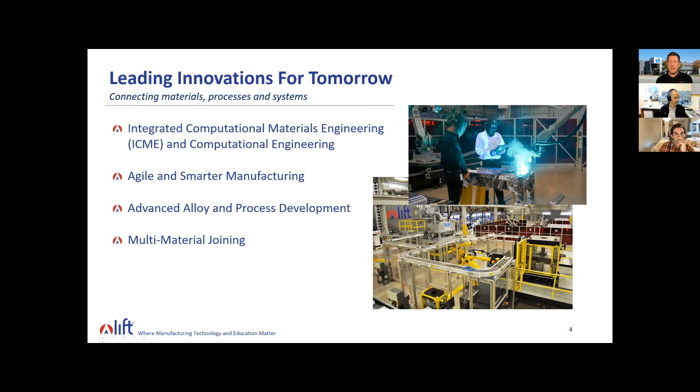We have four main pillars of technology, all the way from ICME, integrated computational materials engineering, to agile and smarter manufacturing, to alloy and process development, multi-material joining. All of these are areas of focus in which we work. A little bit deeper dive here on the screen. You can see all the different avenues and different project areas that we work on underneath those pillars. So you can imagine there's a lot of work going on in our ecosystem focused on these pillars.

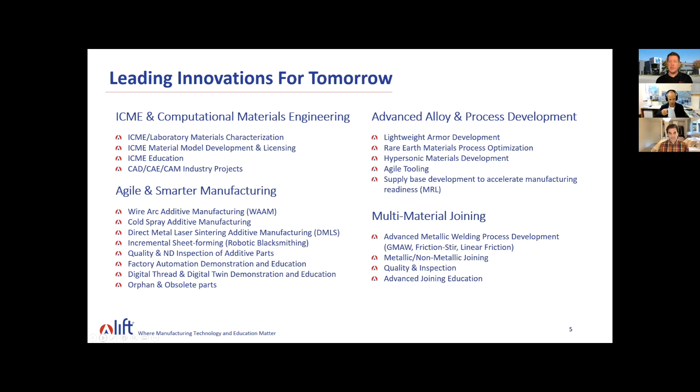On the talent side, again, it's all about innovation, new learning tools, pathways, and venues, kind of revolving around our Ignite Mastering Manufacturing curriculum, which is a high school curriculum, 3-year program that high school students participate in around the country, actually. But we do host it at our LIFT Learning Lab as well, which is in our Detroit facility, overlooking our high bay. So not only do students come in to participate in the Ignite curriculum and get some hands-on experience with material science and pneumatics, electronics, smart manufacturing, all of those things, just to see what manufacturing looks like in the year 2021, but they get to look out on our high bay floor and see our technicians hard at work with innovations that our members are currently working on.

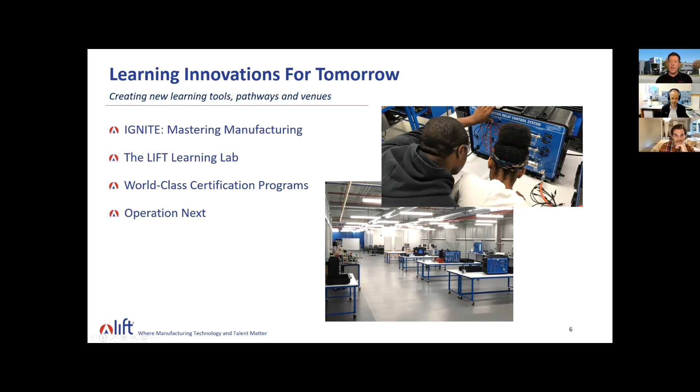We also offer world-class certification programs in jobs that are available today: CNC, welding, industrial technology maintenance, robotics. We offer that via our LIFT certified program, as well as a program called Operation Next, which is one we are most proud of, for active duty men and women in the military. Before they leave the service, we give them the opportunity to earn a credential in one of those in-demand jobs.

So not only do they leave the base and get on to their next operation, their civilian career, but they walk out of the gates with an in-demand, industry-recognized, nationally portable credential so they can go get a job immediately. And that program has been expanding across the country. It's available to the National Guard and Reserve in Michigan, Florida, Wisconsin, and also available at Fort Campbell, Kentucky. And stay tuned for a future announcement on another base later on this year. So we're excited about that program.

So I mentioned LIFT is a membership organization. So what do you get from being a LIFT member? Well, all the things you see on the screen, from being a trusted advisor, helping people turn the corner with smarter manufacturing, technology accelerator, taking technology innovations from concept to commercialization, technology showcase, invites you to visit our 100,000 square foot facility you see behind me in Detroit, showing you the art of the possible with smarter manufacturing. We're a connector and convener, which is why we're all here today. A talent developer, spoke with you about that already.

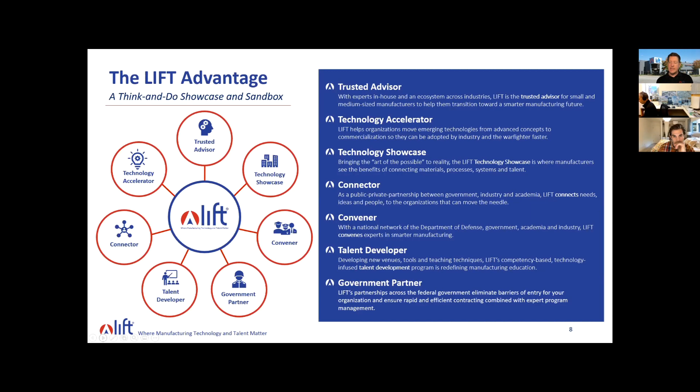So that is LIFT in a nutshell, but I'm going to stop sharing my screen and I'm going to turn it over to Ethan and Riley from ARRIS Composites to talk to us about what they're working on. So gentlemen, the show is yours.

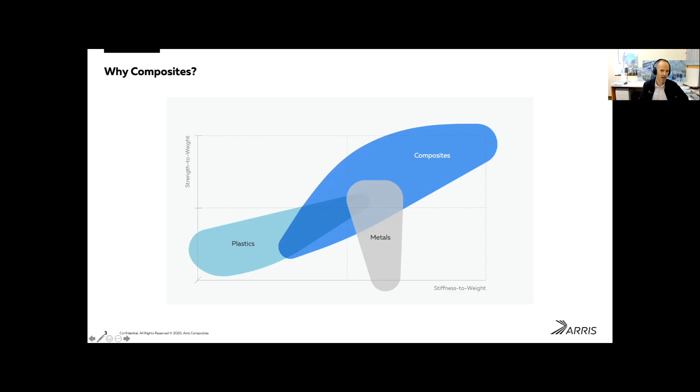But with that, those chopped fibers essentially pushed the plastic space a little bit up into the right of this stiffness to weight, strength to weight ratio chart, giving plastics the ability to move into some of the spaces where you'd have aluminum and some of the metals and the non-structural parts. However, with many of the advanced composites, whether it's sheet materials or aligned fiber materials, the cost of many of those manufacturing methods was out of reach for the larger mass market industries.

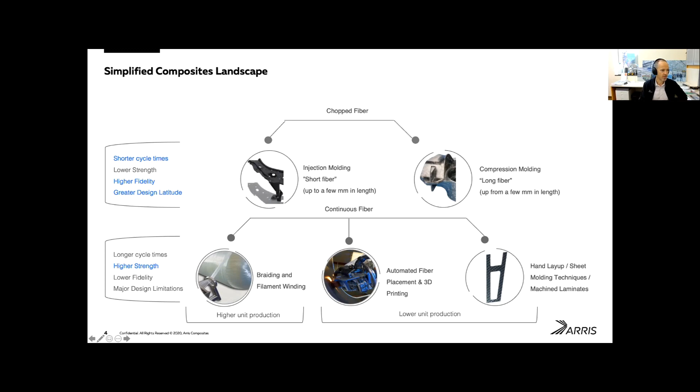And we won't go through this in a lot of detail, but the important point here with this overview of the composites landscape is that these technologies on the top row that had greater design latitude to make the valuable parts that carried load paths through all three dimensions really had lower strength, whereas many of the higher strength methods on the bottom row have significant design limitations associated with them. So this is really the space that we came into, where we're looking at these feedstocks that are typically used in the continuous fiber world.

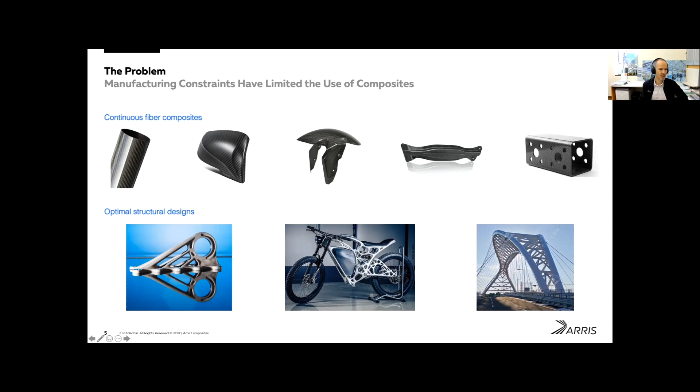And looking at these feedstocks, this was really in the backdrop of this renaissance of structural design, where topology optimization and these academically ideal designs were being really popularized by the 3D printing industry. However, the manufacturing methods, primarily working with pure resins or pure metals, were not really the best material for these lightweight structural designs. And the challenge revolves around, we use the grain of a tree to demonstrate anisotropic materials, these orthotropic composites, and how intuitively we all know how the grain of a tree follows the load paths that the branches and the boughs face.

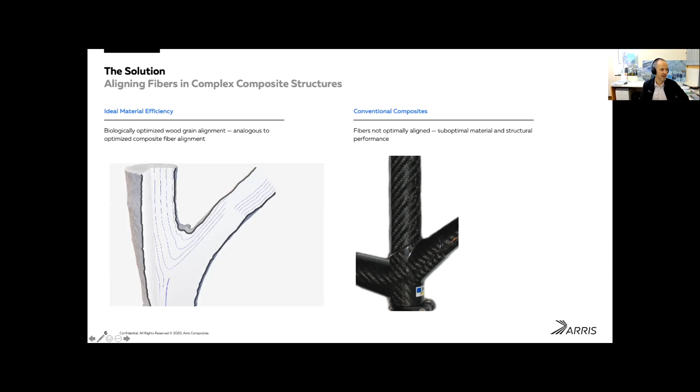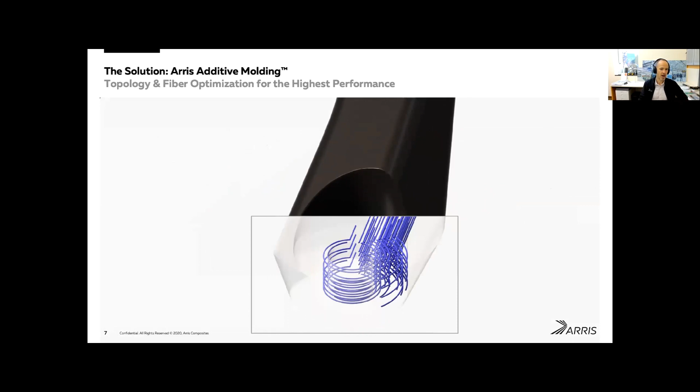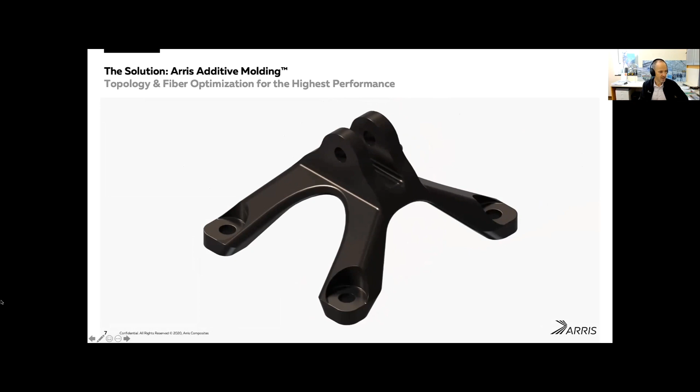And the challenge in complex composite structures is running the fibers through; that is not really practical today. And this is really where we developed our manufacturing method to enable the use of these continuous fiber materials, but aligning them along the stress loading paths within these complex parts, and in particular, these topology optimized parts, where you're getting the best out of both worlds, the best of the structural design world and the best out of the materials world. And this is an image of the actual part that was in that animation.

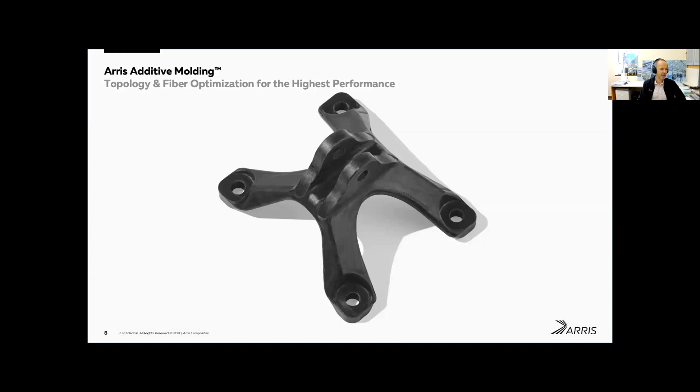And what I'm going to do is hand the presentation for a couple slides here to our CTO and material scientist by training, Riley Reese, to speak a little bit about the work that we've done with a few customers and how we do this. So Riley, are you? Yeah, sure. You have audio? Yep, I'd like to start with this Northrop Grumman study.

So we had a detailed paper that we published in collaboration with Northrop Grumman at CAMX. It really goes through the first phase of design optimization and the anisotropic topology optimization that we developed here at Arris that gives us the ideal shapes for continuous fiber composites. And then here you just see the end of the paper, which shows some of the experimental results that we did around this benchmark part that Northrop Grumman had.

So the top left was the design they start with. It's a 3D printed T design. That's their baseline. So we redesigned it, taking advantage of the load conditions and the ideal fiber alignment, made these brackets with our process, and we were able to match the stiffness of the titanium bracket. You can see the slope of the lines are the same. Our line is the blue line.

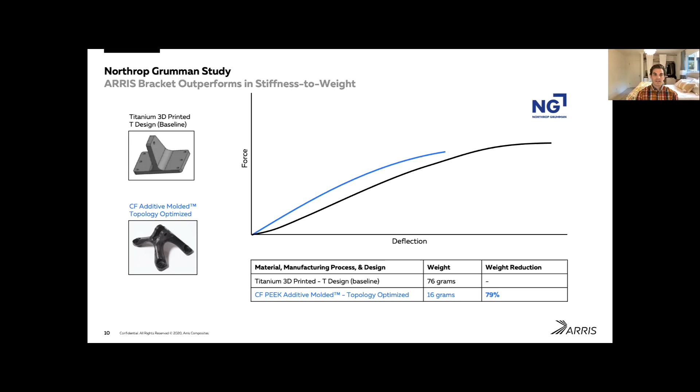And then we were able to do that, but remove 80% of the weight of that original bracket. So you're left with a structure that's 20% of the weight of that original bracket, yet has the same stiffness, and the huge jump in performance is something that really is unrivaled when you look across the capabilities in other manufacturing tech.

We had a similar exercise that we did with Airbus as well, and we took this bracket that was 220 grams. You can see our final bracket on the right. Their bracket was actually an assembly and a bit more complex. We were able to take their original bracket, take out 75% of the weight, and we did a study to really look at not just the performance benefit or weight savings that you get from fuel, but the impact that this has on the environment.

And so when you do just some rough numbers around this, you find that just taking this bracket and implementing this bracket on one version of the Airbus aircraft, the A350, and you take it over the lifetime of those planes flying for aircraft made in just 1 year, you end up removing 357 million metric tons of CO2 emissions, and that's equivalent to 22 million U.S. persons' emissions in a year, or equivalent to 0.75% of worldwide emissions in a year.

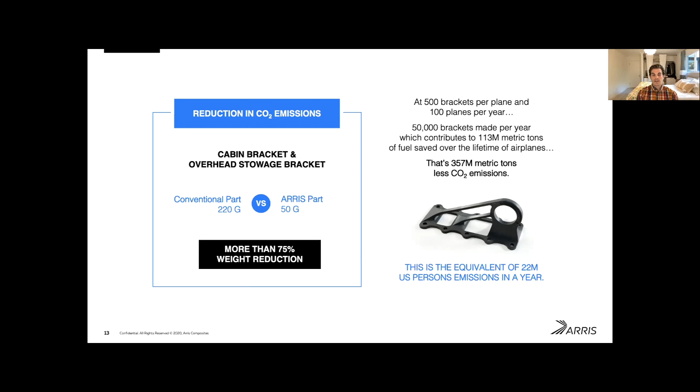And so what would at first seem insignificant actually makes a pretty significant chunk of savings, both in fuel and CO2 emissions. And this is just the start of what technology we can bring to aerospace and lightweighting.

So I'll do a hard pivot here, where we were talking about aerospace with the last two case studies. And one of the important things is, while our additive molding technology that we'll look at in a minute can be applied to these more high mix manufacturing environments, our systems can be configured for higher volume production as well. And we'll talk about that in a little bit more detail.

But the thing about working with the consumer products and sporting goods and drone companies that we are is the speed with which they can get products to market, and the ability to innovate in more disruptive ways. The two bracket examples that we looked at are drop-in replacements that significantly outperform the existing component. And in some of these areas, in products that have very long life cycles, the drop-in replacement is the practical solution for us to look at first products in market.

However, in a space like drones, where there is a lot more latitude for innovation and a lot shorter design cycle, we can do things that are far more disruptive. And this becomes a little bit better illustration of what we can look at in terms of product architecture, since we've looked at just the pure performance around structural elements. So Skydio won the Consumer Electronics Show Innovation Awards for this X2 drone.

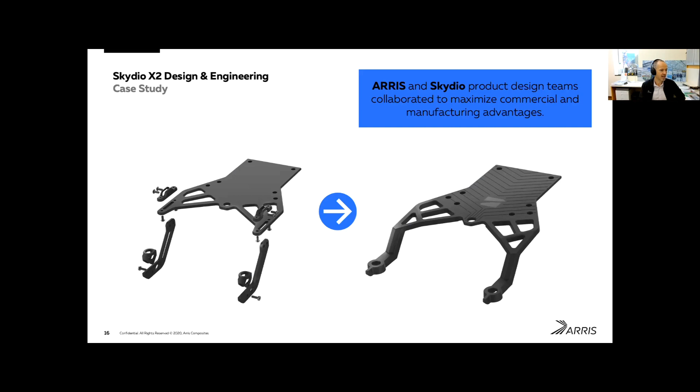A significant portion of their marketing up into this product launch related to this case study, that I will show you here, about how they significantly altered their design based on the state of the art in manufacturing, and took advantage of our design latitude to make a drone aerostructure that significantly outperformed what had been

possible before. So consolidating 17 parts into one, 25% lighter, but also increasing strength, stiffness, and durability at the same time as reducing weight. And quite novel is the use of an antenna window within a complex structure like this, where there have been antenna windows used for decades in aerospace.

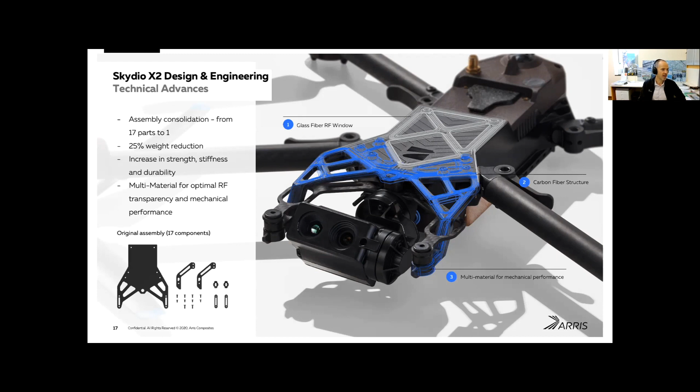There hasn't been really a cost-effective way to scale production of these advanced composite parts for these higher volume applications. In particular, doing so with the design complexity and the composite material capabilities that our methods enable.

And particularly noteworthy for any kind of structures that move, whether it's vehicles or aircraft, is using these aligned continuous carbon fiber materials through open structure lattices, like are on the top of the part, but also in the structure of the sheet material.

We're calling this a rib on sheet structure, where you have the ribs reinforcing the sheet material in that bottom area, and then you have distinctly different properties of the glass fiber and carbon fiber. So you're achieving a variety of functional requirements within the part.

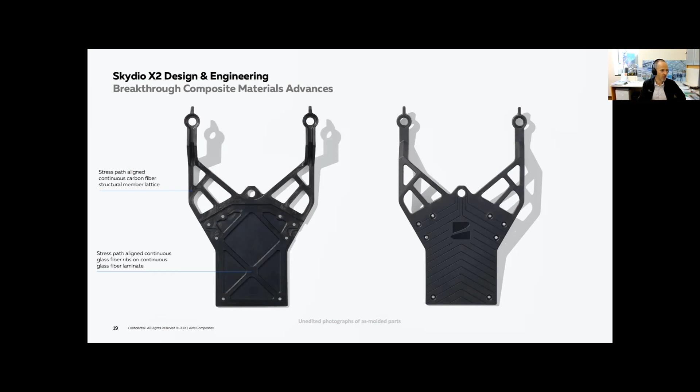Also, after we achieved all the engineering requirements, the industrial design team was able to take some of the best in class in-mold finishing design latitudes to design this kind of beautiful industrial design that really became the brand identity of the product.

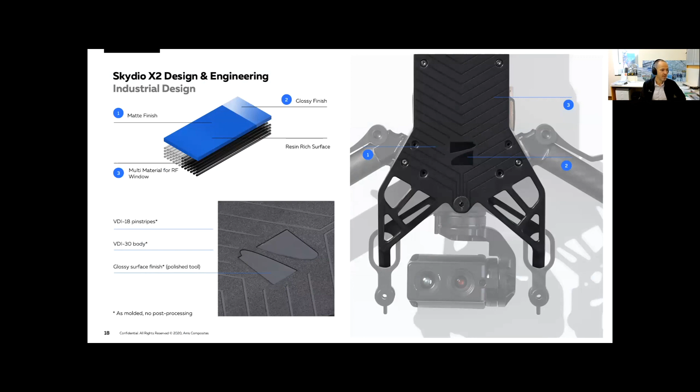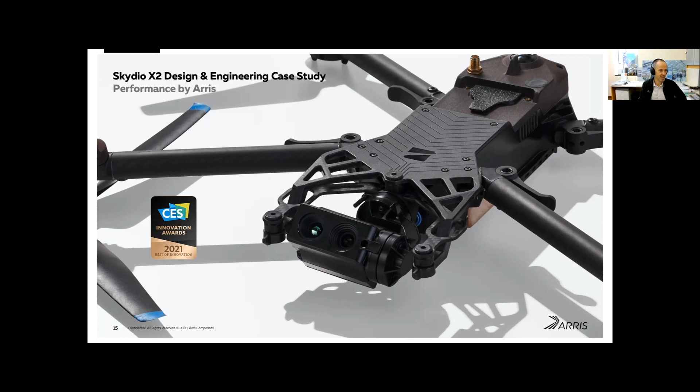And by using tool finishing techniques, every part that comes out of our additive molding tool takes on this really just beautiful look, without any kind of post-processing or substantial cost associated with the post-processing that has really characterized a lot of the additive manufacturing technologies, and has been a barrier to the post-machining and post-processing and finishing.

So the way the technology works, we'll go over a couple slides here, but at a high level, these three buckets are the primary drivers of value. So starting from the bottom, material scalability really comes from, we're standing on the shoulders of great innovators in the resin and fiber world that have pushed forward the thermoplastic composites that we work with, both in the aerospace materials.

So the bracket that we showed earlier here, for those of you that have worked with the aerospace grade materials, you'll recognize that ring of the aerospace grade PEEK carbon fiber. And then when you look at the

resin systems that we use for these consumer products, that have a much lower cost point, there's been a substantial amount of work that's been done for the cosmetics and driving the cost performance profile of those consumer and automotive grade resins higher and higher as the injection molding world has really demanded such high volumes of these materials. So, each one of these three areas we could talk about in great depth. I'll hit on them pretty quickly here, though.

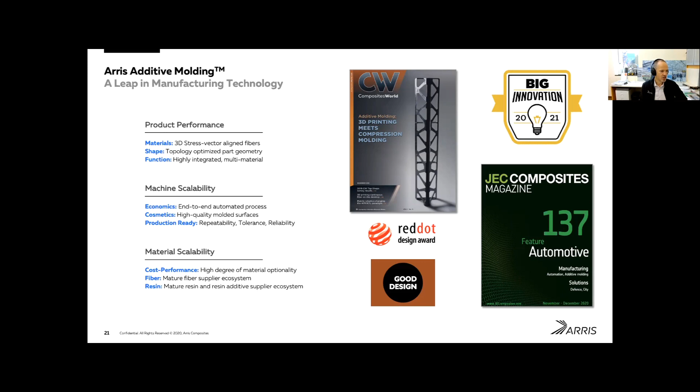So we'll typically look at two types of applications: things that are purely pursuing structure, where we have a load to carry through a white space, and then things that might have a bit more of a limited design envelope for us to work within.

So examples of that might be consumer electronics, as in the case of watches, or portable electronics, or things where there is a very set geometry that we have to work with. And within that, we might have just millimeters of design latitude in certain areas.

So with that, we typically will define a set of requirements, and Riley, I don't know if you're able to speak through this right now, but Riley's team has developed our software tools and collaborates with our customers on these collaborations. So let me have you actually speak through this.

Yeah, so this kind of outlines the steps in the software process that effectively constitute the sum of what we can do around optimal design for composites.

And so in the best case, we can start with requirements from the customer, both geometric requirements in terms of where the part is mating or interfacing with other sections that are fixed boundaries, and then where we have freedom to design, and then the mechanical requirements around where the load cases are on that part. So with load cases and with boundary conditions, we can then run through our topology optimization.

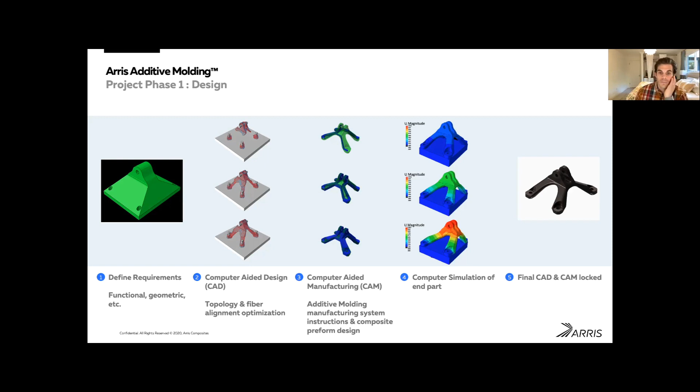And then we lock the design and send it over to manufacturing, where we use this software to drive this manufacturing process that you see. We start with the raw materials in-house. We work with thermoplastic polymers and a variety of fibers. Starting with the raw materials, we impregnate the raw materials together to create the prepreg that then goes through this shaping process where the prepregs are formed into preformed composites, and the piece is then assembled.

So you get this near net shape that can then be placed quickly into a tool where the mold processing under heat and pressure consolidates that part, giving you a very low void content, the full structure and distribution of the resin and fiber in the final part, and ultimately deriving the surface finishes Ethan was talking about with Skydio. And so through this process, we can bring this continuous fiber capability into mass production.

Right. I don't know if you can see the question up here, and while I would hold questions towards the end, this would probably be a really appropriate time to address it. Okay. Oh, actually, it's not showing up. It's just showing up on mine.

From Ryan: Is the optimizer including fiber alignment as a design variable and calculating sensitivities along the density variables, or are they set equal to local principal stress directions at each iteration?

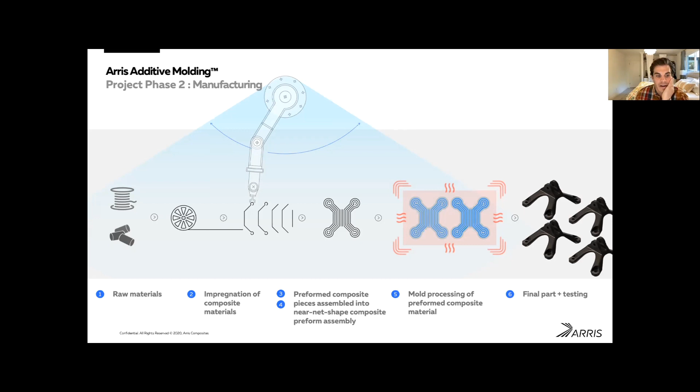Yeah. So the fiber alignments are set based on the local principal stress directions of the mesh at each iteration. We start with all the fiber pointing in one direction, and then through the iterative approach, the fibers are reorienting themselves to align against that principal stress direction. And then we run the simulation until we're seeing very little movement in the fiber alignment, and we'll stop it at that point.

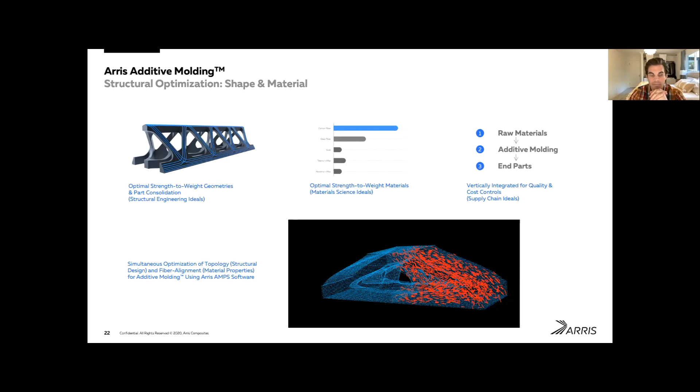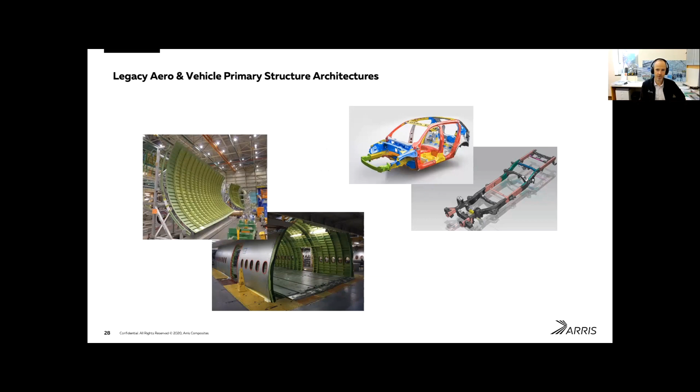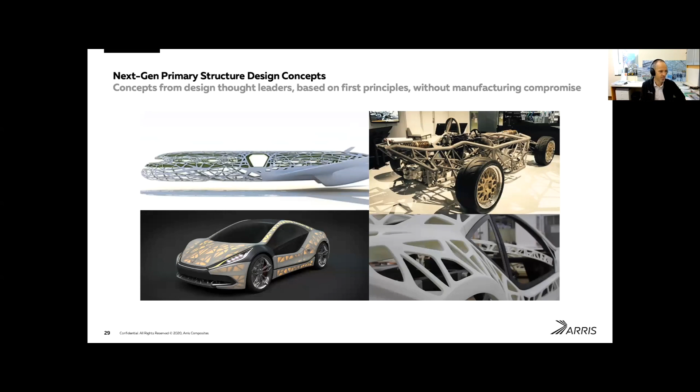So when we look at a lot of the legacy designs, I think everybody's pretty familiar with the structures underneath the skin. And when you look at some of the concepts without manufacturing compromise, you typically are getting to these almost more topology optimized shapes that are impractical given existing manufacturing limitations.

So the reason you see open structures on many of the largest structures, but closed structures on beams in a typical building, is the cost of really judicious use of material. The cost of making that open structure does not outweigh the value that it delivers. So that's why there are so many of these closed cross-section beams in the world of metal. And these closed cross-section composite beams also, because of the existing production technologies, are used more broadly than open structures.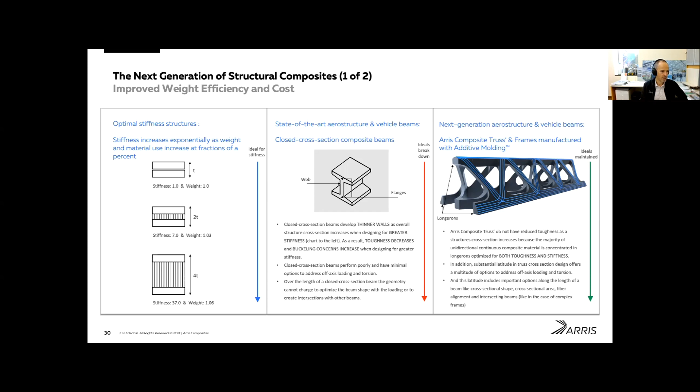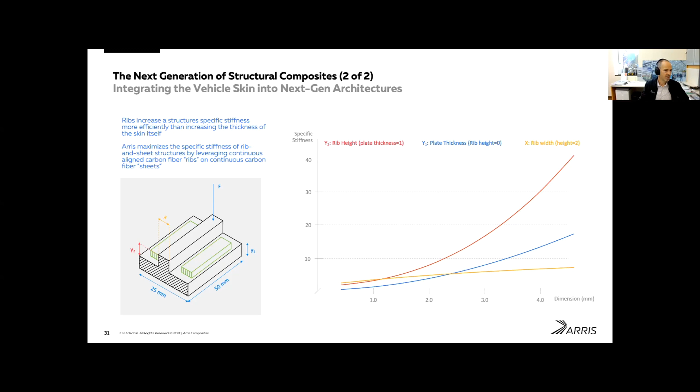However, you can see that approach has its limitations, as that blue Y dimension does not drive the specific stiffness of the structure as much as the rib does. And it's actually not the width of the rib, that X dimension, it's the height of the rib. And this all goes back to the previous slide, that thickness is so important in driving stiffness. So our ability to make the complex ribs on the backside of continuous composite or other types of material, in this case continuous ribs on a continuous sheet of composite material, really allows us to take advantage of that red dimension, the thickness that drives the specific stiffness of anything optimally.

So we've really been looking purely at some of the mechanical design requirements. If we pivot and look at what you can do with multiple materials, we have a couple slides that speak to that. And the important area that this focuses on is the fact that we are an additive technology. While the previous slides were speaking to our approach of using aligned composite materials and additively building up those materials so we have the aligned fibers in the right areas, the other benefit of using that additive process is that we can switch out the materials, as in the glass fiber antenna window example that we had before.

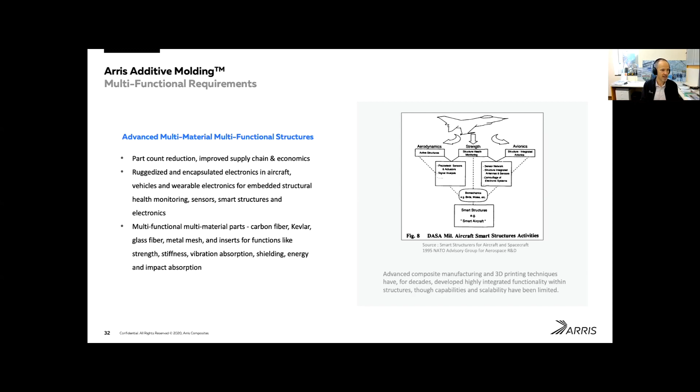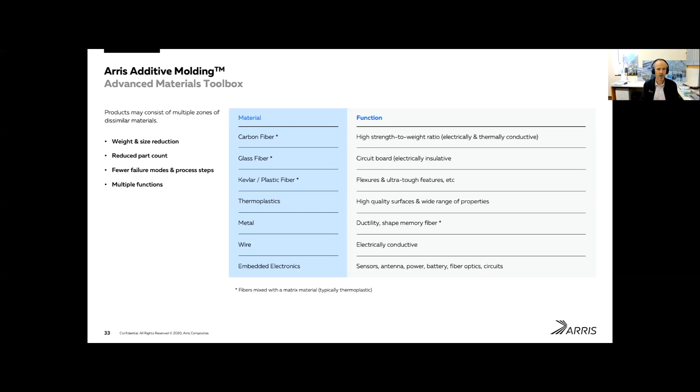But there's a whole variety of other functional requirements that might be served with this. A lot of the pioneering work for these applications has been done over the decades in aerospace and DoD, taking advantage of a wide variety of different composite materials and embedding them for a whole variety of functions. Our ability to put these different materials into complex single parts allows us to meet a variety of functional requirements that are typically done through different components made in an assembly, whether it's the antenna window or damping, vibration absorption, tough areas, stiff areas, and shielding is obviously a big one as well.

And we're really at a moment where these capabilities are very exciting for many of our customers that are taking connectivity into a whole variety of devices and vehicles. I think everybody is probably acutely aware of all the concepts around IoT in a variety of industries. So never has there been a greater importance associated with antenna performance within very compact structures that are highly ruggedized. And many of the business models around these IoT type devices really require incredible chemical resistance, environmental ruggedness, and lightweight, which typically is a key element of many of the business models for these customers.

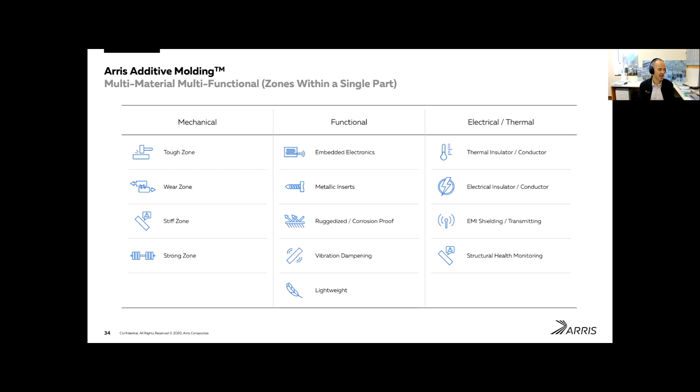Also, last piece, wrapping up, and then we'll just talk about a couple markets and finish up our presentation here: for many of our customers, sustainability is a significant element considered in next generation products. Obviously, in the world of consumer products, the way they look at sustainability and their life cycle analysis is quite different from the aerospace world. So, case in point, that third step, product life: in the case that Riley gave earlier, lightweighting the Airbus bracket has a huge value in terms of sustainability. But that part might have an effective life of well over a decade.

And so recycling is not as much a driver in the life cycle analysis as the product life. But for some of our consumer product customers, the ability to take composites and for the first time really recycle them efficiently, where previously you would have needed pyrolysis to burn off resin systems, and there weren't really well-organized recycling programs for these, is a significant pain point that limited adoption. Some of the novel recycling methods that we're working with them on really open up some of their sustainability objectives, as well as the performance areas that we've talked about.

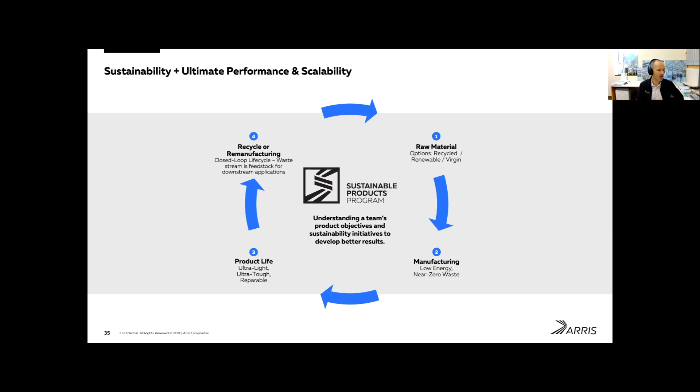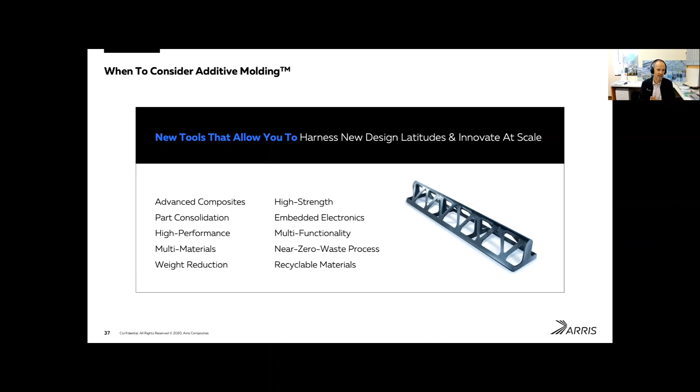So with that, we can look at a few of the different kinds of industries that we work with, and we really see some of these ideas around key capabilities that frequently identify great applications for us, where we can find a really good new way of doing something. This just lists off some of them that we've touched on here: part consolidation, performance drives commercial value, multiple materials drive a more compact package or a more compact, higher performance device. So this really hits on some of those primary topics that are good starting point questions for the variety of industries that we might work with.

So we really have two distinctly different areas of the company. The consumer products and a lot of consumer electronics, and we have a lot of the new product introduction and prototype work for that done at ARRIS US in California, and we do have production here, but we also have production in Taiwan, where we have set up the facility for many of our customers that are doing assembly in Asia and required in-region production for their supply chain requirements.

When we're shipping thousands of these parts at a very high frequency, their supply chain requirements require a more compact footprint. So we offer that service as well as domestic production for some of the customers. Skydio is a great example of a company that has brought great drone production back to the U.S. and reshored and developed a great product meeting a global demand as well as U.S.

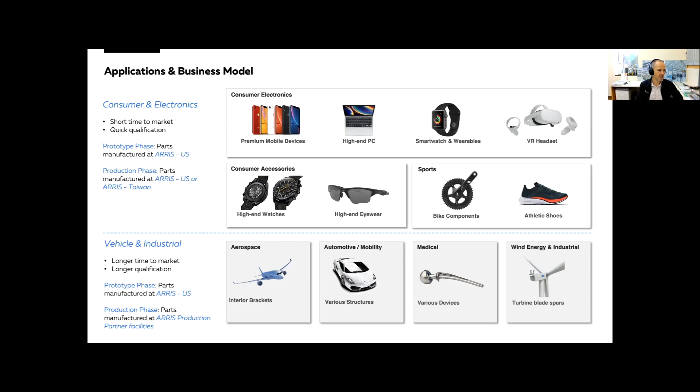Government requirements. So with regards to vehicle and industrial, similarly, we do the prototyping and development work out of our U.S. facility. Obviously, we have our partnership with LIFT as well. And for the production phase, we do have production partners that we will be announcing in the 2023 timeframe in these other areas, as there are obviously great leaders in these different industries that would be the key partners that we would work with on those.

So that is an overview with the expertise in manufacturing that we have on the phone. We could probably take this amount of time on one of a few dozen different topics that we only scratch the surface on here, but I certainly thank LIFT for the opportunity to speak to everyone, and we're happy to answer any questions.

Hey, we appreciate that. Thank you so much for the presentation and introduction, and folks on the line can understand why ARRIS and LIFT have partnered. As I mentioned at the beginning, our view of things in terms of connecting materials, processes, and systems. I think you saw that run through this presentation here.

A couple questions have come up, and one that I wanted to ask, and I've asked this of people previously as it relates to different materials or processes they're speaking on. How do you determine, what decision process do you go through in terms of when to use, say, the composite techniques that you were talking about? Obviously that's your business, so you want to employ that as often as possible, but how often would you say maybe this is not the best route to go for whatever component someone is trying to make? How do you walk through that decision making?